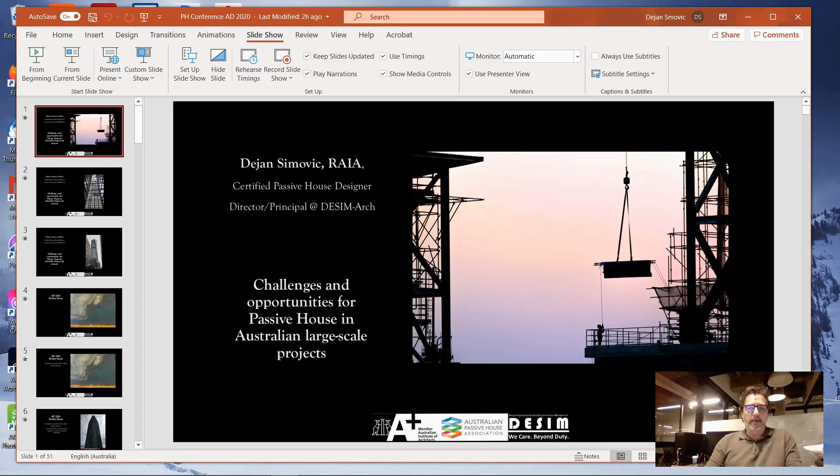My name is Dejan Simovic, I'm an engineer of architecture and registered architect and certified passive house designer. I studied and graduated architecture at University of Belgrade in Serbia some 30 years ago. At the time, studies included building physics, which also included principles of what was to become the passive house system.

I've been working in Australia for builders and developers for most of the past 20 years, and I was involved in some of the largest residential projects in Sydney, Brisbane and Gold Coast. I believe that this gives me reasonably good understanding of passive house energy efficiency as well as a good overview of the local construction industry. I have to say that this presentation is not a scientific work but rather a personal professional view by someone with quite a bit of experience.

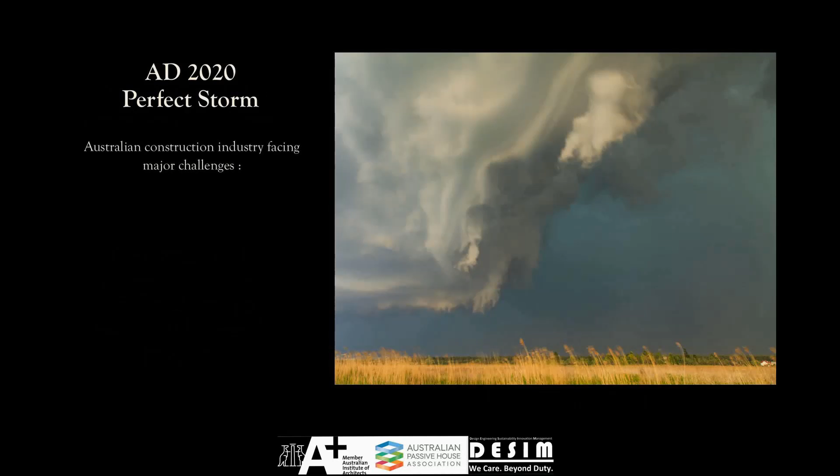And here we are. Year is Anno Domini 2020 in Australia. It's a perfect storm for the local construction industry. First, we have a loss of confidence in the construction industry because of the very well-publicised failures in some major residential projects.

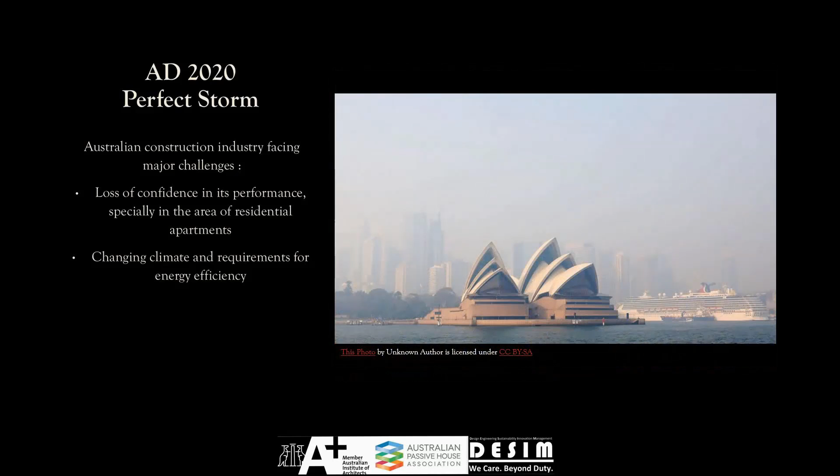Apart from that, we have climate change with the horrifying fires on the eastern and southern seaboard last year and beginning of this year, with the loss of life and property, and large cities engulfed in toxic smoke for weeks. At the same time, we have a problem of affordability of energy, as well as constant arguments about the amount of CO2 emissions and their impact on our lives.

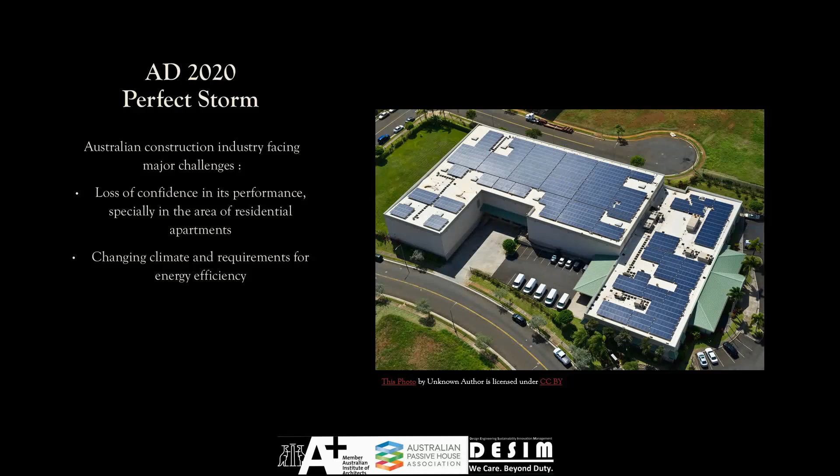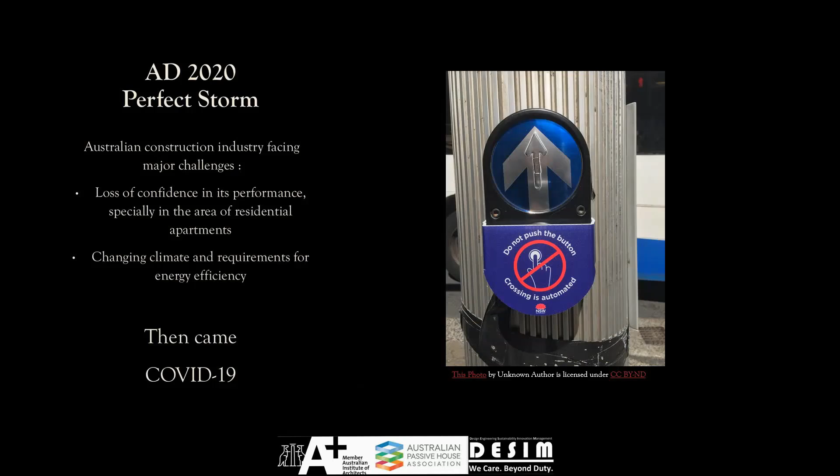Then came COVID-19, social distancing, travel disruptions, lockdowns, closing of economy, and various other consequences. All of these issues cause challenges but also opportunities for implementation of the passive house standard and system. We'll look at the individual items.

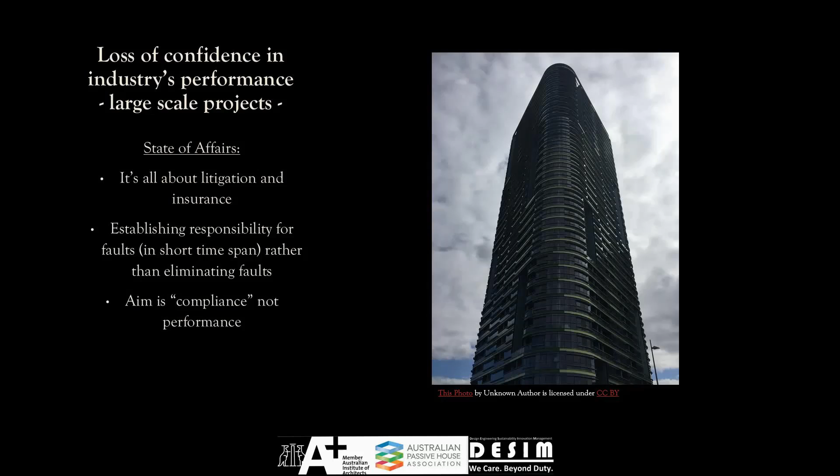Reasons for loss of confidence in Australian construction industry are various. In my view, the whole system of construction has been designed by lawyers and the insurance industry with the aim to reduce responsibility and avoid claims, but not through providing better quality, rather through being able to pass the buck to someone else. Keyword is compliance, ticking the box, where performance and the term fit for purpose are to be avoided at all costs. Establishing compliance is a segmented process where the assumption is that if a single part is certified, the whole system is going to be certified, which is obviously not the case.

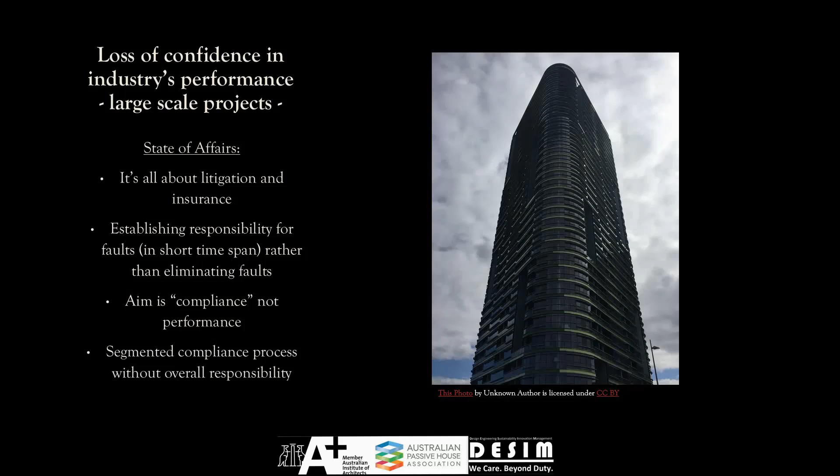In this environment, major challenges for implementing passive house are related to the fact that passive house is introducing disruption, hard work and science to the whole process. It is disrupting well-established but not well-performing procedures and relationships. Some of them you can see on a screen.

Established construction programming procedures, construction managers used to their own routines, established relationships with subcontractors, suppliers. At the same time, established contracting arrangements - our building contracts - are going to require significant change in order to implement passive house procedures.

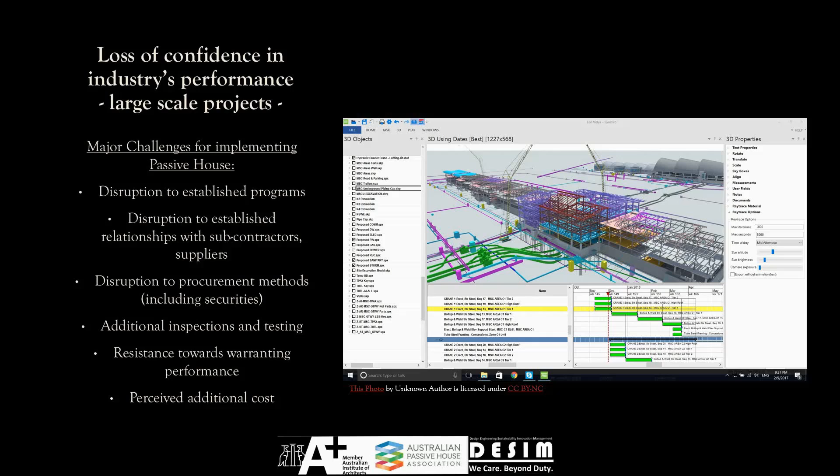Those procedures will include additional inspections and testing, quality control in general, and in addition to that, requirements for performance of the final product, which is not commonly accepted by participants in a procurement process.

The usual defense and excuse from the established system is that passive house has additional cost and is therefore unaffordable for end users.

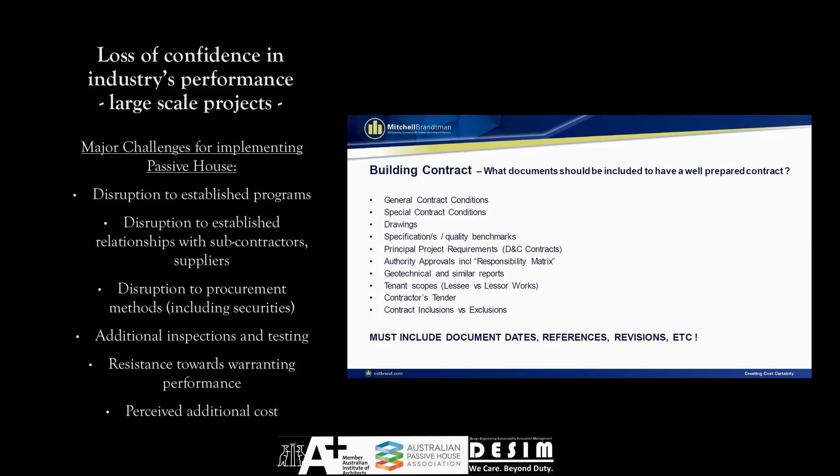To be fair, a portion of the problem starts from planning rules and design. Requirements from designers and their designs are to be imaginative, innovative, landmark, award-winning. This leads to over-designed projects in any aspect, but not in their fitness for purpose, in their performance, and in their measurable comfort and health levels. And that is where the perception of additional cost of passive house is coming from.

Designers will not win much recognition for delivering a project that is within budget. They need to win awards in order to get new commissions. There is no such thing as comparison of like to like. A non-performing building cannot be compared with a high-performing building any more than a non-performing car, a submarine or a plane can be compared to a high-performing one.

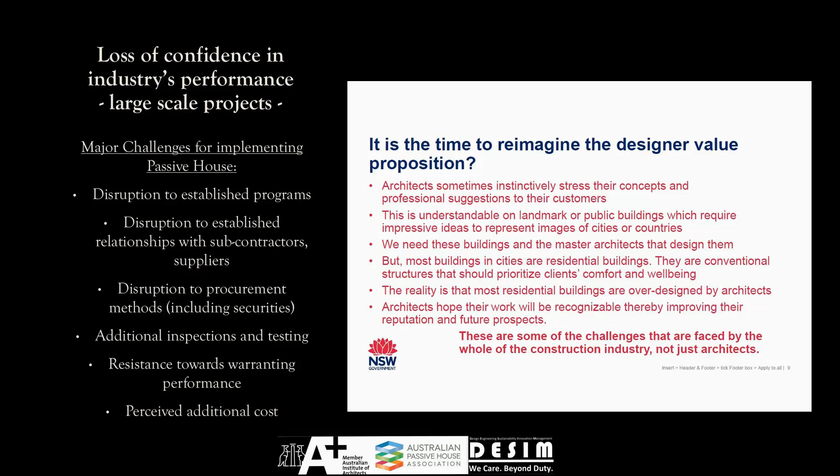We need finally to start rewarding performance. Other industries, like the car industry, have already accepted that form follows performance. However, in other industries, non-performing products are eliminated during the testing and prototyping stages, so non-performing products don't get to the market in most cases.

Unfortunately, our industry has limited space for prototyping. Buildings are unique, once-off generally, although there is an exception there. This is why performance must be ensured during the design process through adequate engineering and quality control. Models of various kinds can assist, but there are performance gaps between models and actual products.

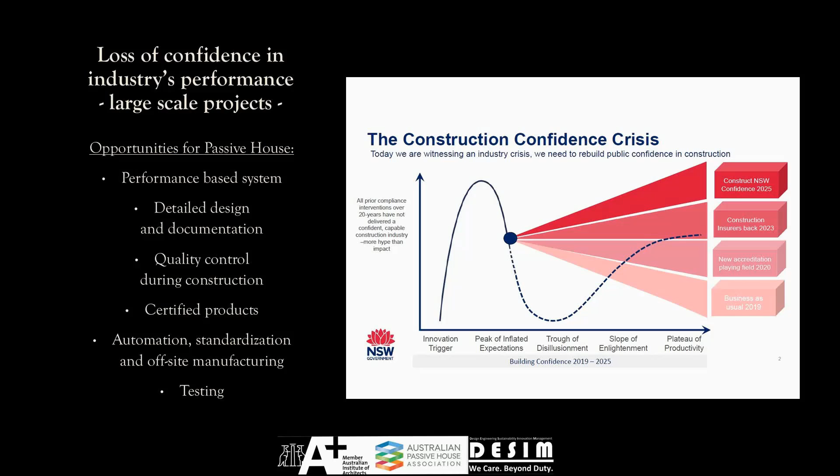However, there are opportunities in all of these problems. Government has recognized that a problem exists with the quality of design and delivery, and new legislation is introduced in New South Wales that will extend duty of care from all parties - developers, consultants, designers, builders - towards end users, and that is beyond actual contractual responsibility, despite end users not being part of the construction procurement process. Special emphasis has been put on the quality of documentation and design supervision, which is at the same time an inherent part of the passive house standard and certification process.

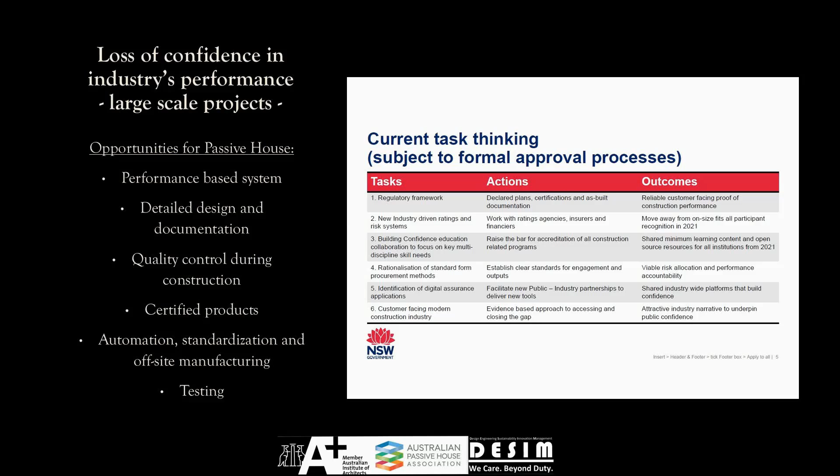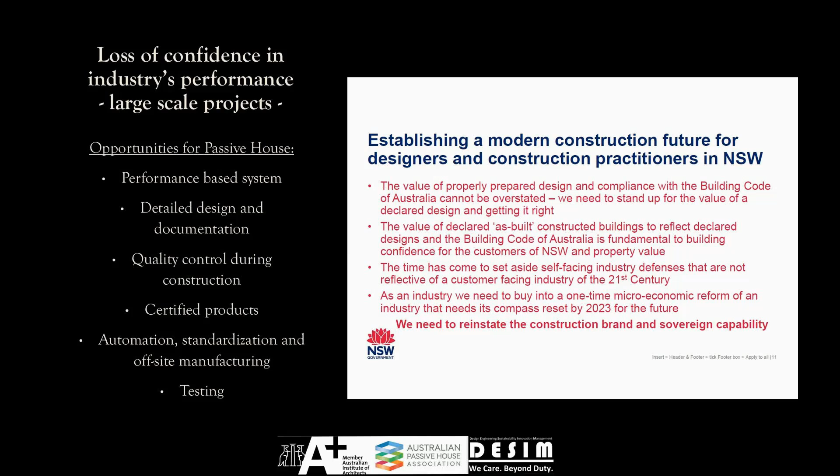Changes in legislation are aimed at improving delivery, procurement, contracting, and accommodating higher levels of automation and off-site manufacturing. Most importantly, the new legislation proposes changes to training and education of designers, professionals, trade people, and builders in order to improve quality control and performance.

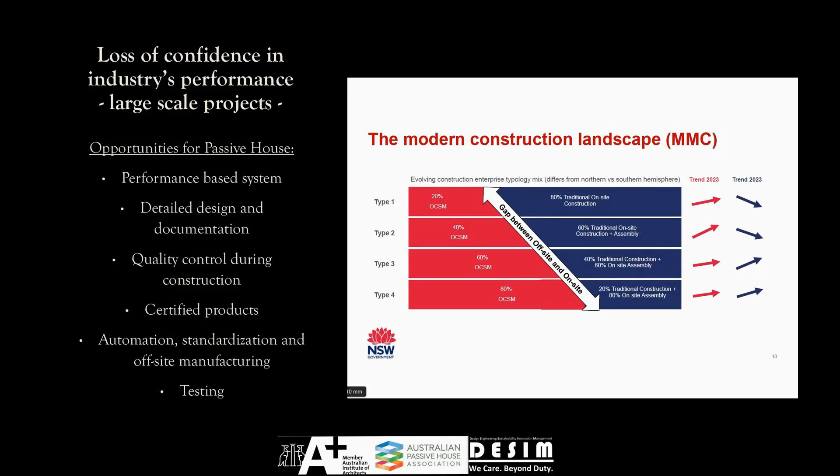New legislation has partly been enacted already, and actions have been taking place for New South Wales from the 1st of September 2020.

These are some of the opportunities for passive house in this difficult situation. Obviously, passive house is already a performance-based system. Detailed design is already part of the passive house system. Quality control during construction is part of the passive house system, including use of certified products, automation, and finally testing and certifying at the end of the process. What is needed is education of all parties in a delivery process about all of these benefits.

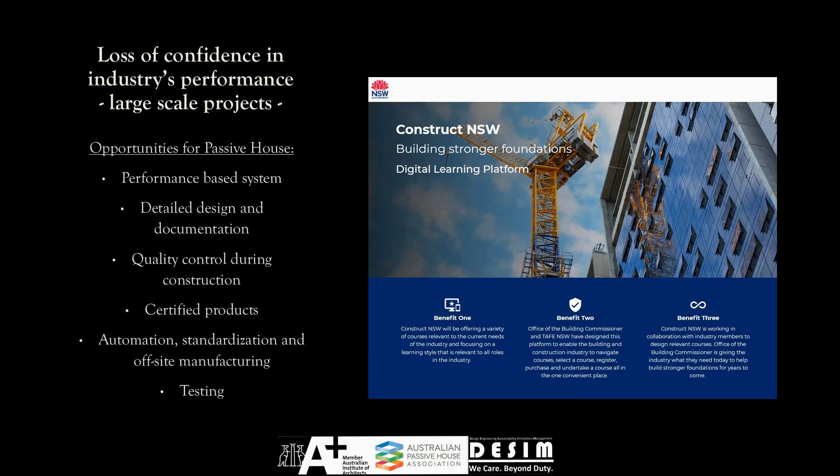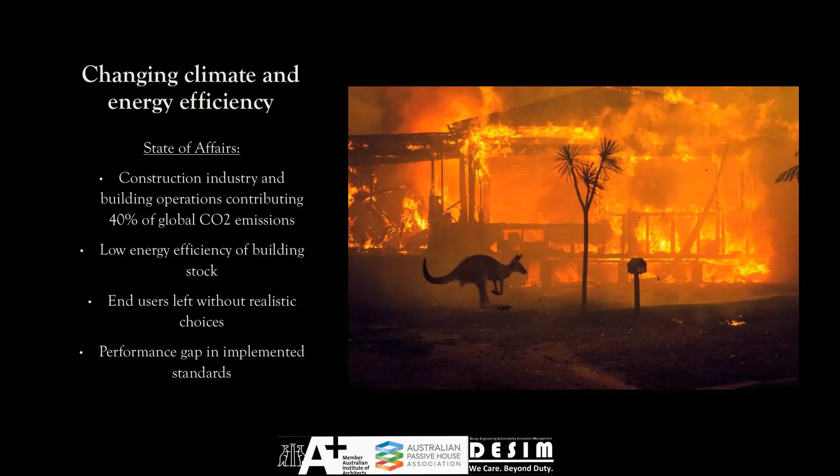Impact of a changing climate on the way we live and the way we build is undeniable, irrespective of the question if there is a human impact or not. The situation is that our industry contributes 40% of CO2 emissions, either through building materials and construction process or through building operations.

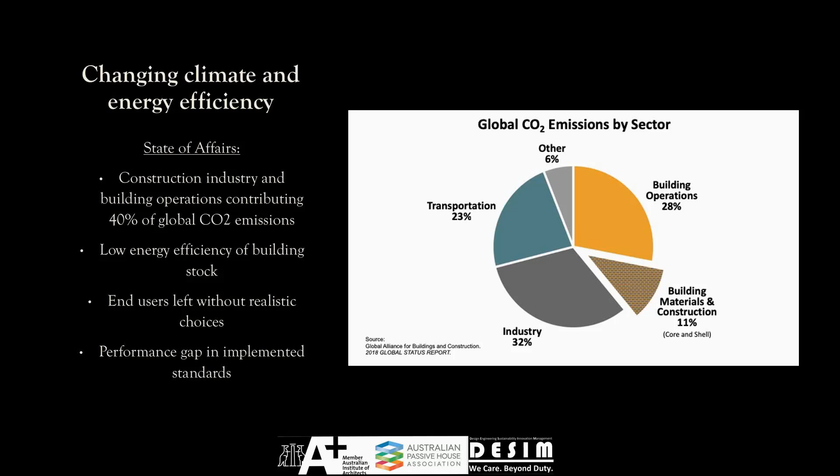At the same time, poor energy efficiency leads to cold and hot homes and high energy bills. It's not like industry is providing much choice to the consumers. Sure, there are various energy efficiency systems, star ratings that try to provide us with a warm, fuzzy feeling that we are all doing a good thing and we're saving energy, money, and the CO2.

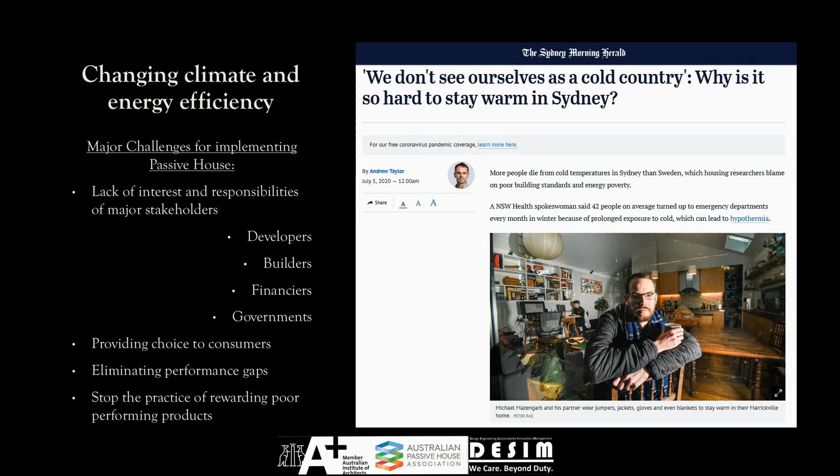However, we all know that there is a performance gap between declaration and actual results of those measurement systems. Fractured and competing interests among major stakeholders in the construction process, with their individual interest in performance measures, lead to the lack of interest into achieving improved efficiency and building performance.

What we can do is use either a stick or a carrot. The stick is regulation and legislation.

Federal government has taken a long road to improving energy efficiency, changing the national construction code with a trajectory to the year 2028. Most important steps are planned for the next 5 years, but could be reviewed at any time and at any step, depending on the pressure from interest groups.

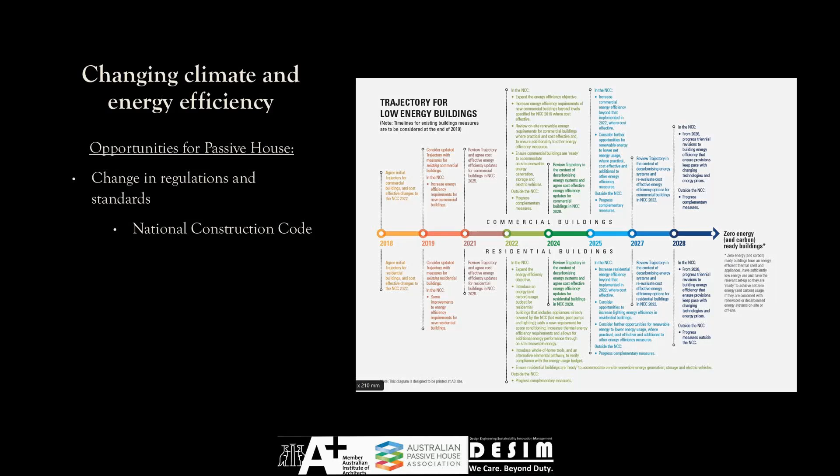Good news is that the implementation of National Construction Code changes will also be retroactive. The implementation will include existing building stock. The carrot, on the other hand, will be market benefits, increased yield, reduction of risk, and improved quality of product.

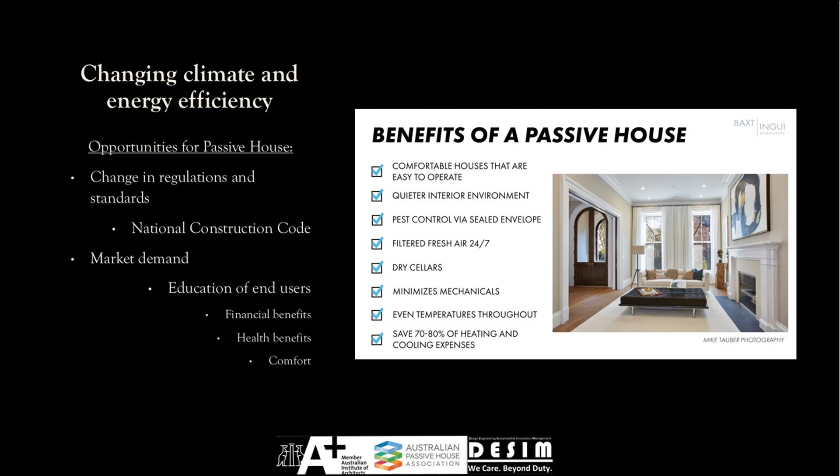Demand has to come from end users or from mortgage holders. Demand from end users is rather straightforward. We all know what the benefits of passive house are. An additional benefit for end users in Australia is that air could be filtered, potentially eliminating smoke caused by increased bushfires.

I believe Cameron Joel might be presenting at this conference with more details. Demand from mortgage holders for energy efficiency is not direct, simply they don't have a direct benefit.

However, increased quality of the product that is collateral for their loans can be an incentive to provide better mortgage rates to the end users. Equally, reduced energy bills will provide more disposable income to consumers and reduce repayment risks for buyers of passive house properties. Some banks have already provided better interest rates for passive house buyers.

In any case, opportunities for promoting and implementing the passive house standard are realistic, in some instances well underway. What is needed is additional education to all participants for all of these benefits, for everyone's good.

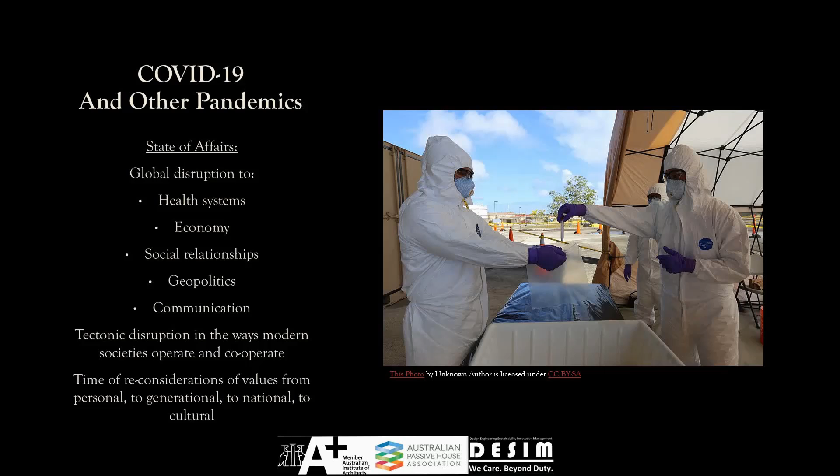When it comes to COVID-19, our lives, our economy and our industries will be different in a post-COVID world. The full extent of the change is still unknown, but global disruption is created to health systems, economies, social relationships, communication, geopolitics. It's a time of reconsideration of values from personal, generational, national and cultural.

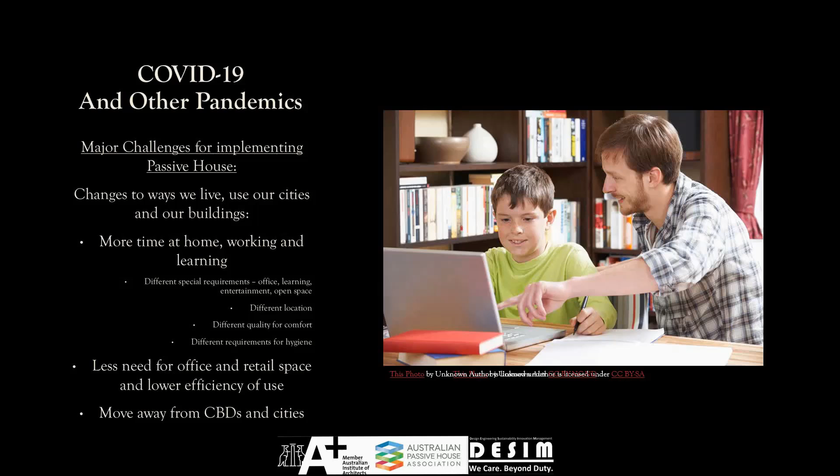It is likely that more people will be working from home, either full-time or part-time. Distant learning will be more prominent. All in all, we'll be spending more time with our families and in our homes, and we will be expecting them to be more comfortable, to have a healthier environment and energy efficiency.

Work in the cities will be less important, but a move towards the regions is already taking place. In any way, the world will have to be replanned and redesigned, so it will be more work for us, and the passive house system provides some important opportunities for that new world.

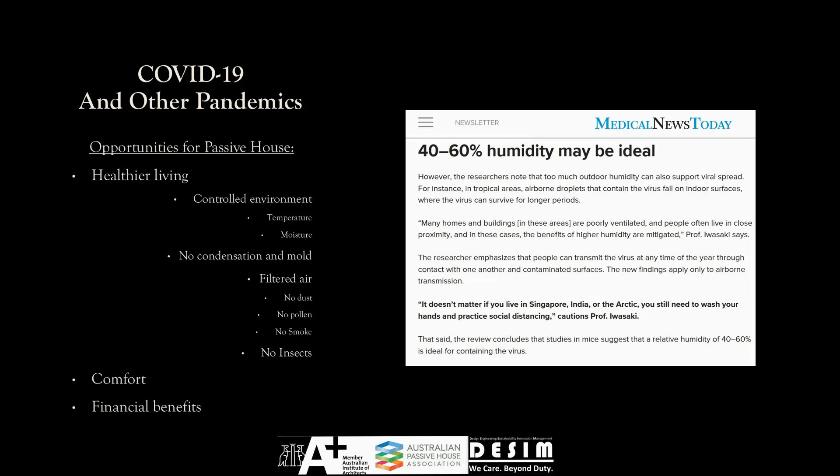The environment in our homes can be healthier, preventing or minimizing growth and spread of various pathogens. End users are often unaware that their homes can be free of moisture and mold, and dust can be avoided.

A lot of money and time has been invested by various stakeholders to convince users that their products and their designs are the only available option, and that all this bad stuff is unavoidable.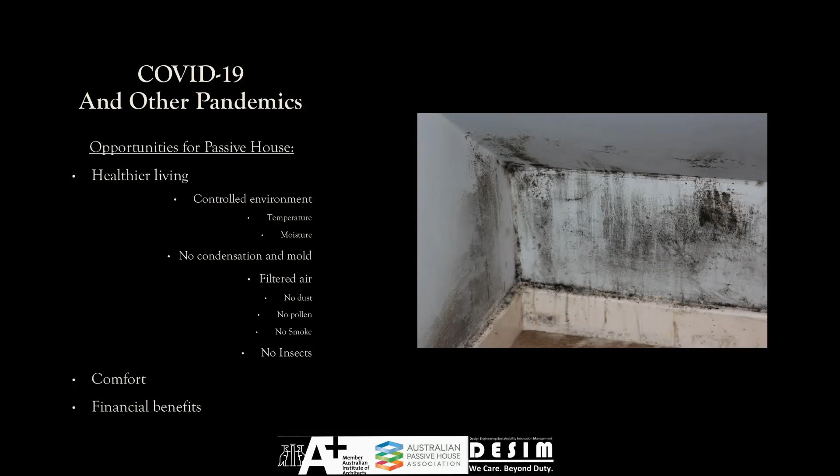It is known that passive house certified buildings are more comfortable. An important part of the post-COVID world will be that those buildings are much healthier as well. A controlled environment provides an opportunity to live and work in buildings where viruses will have less chance to survive and spread. In conclusion, there are many reasons to be optimistic about future passive house implementation on a large scale, despite huge obstacles at present.

All the obstacles we have seen are related to aversion to perceived risk, perceived because it is fear of something new and unknown. We all know that passive house is about reducing risk by implementing knowledge and science. Therefore, I think that...

Education is the key, and these are the fields where integration should take place. Knowledge is power. These efforts could reduce further undue resistance to implementing the passive house standard into our construction industry and achieving better quality of our built environment.